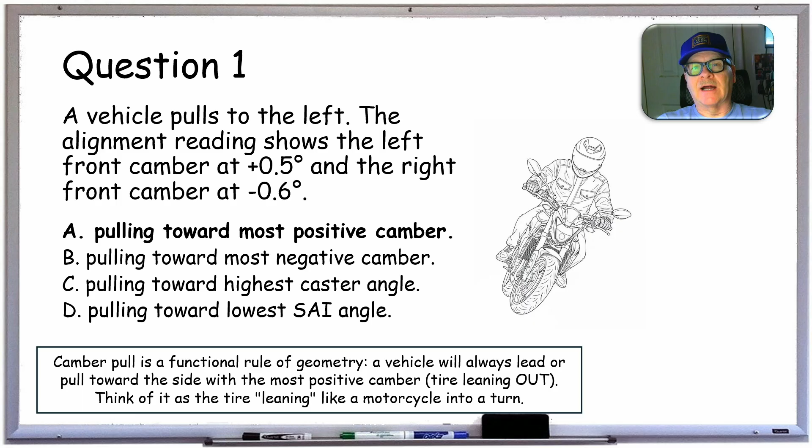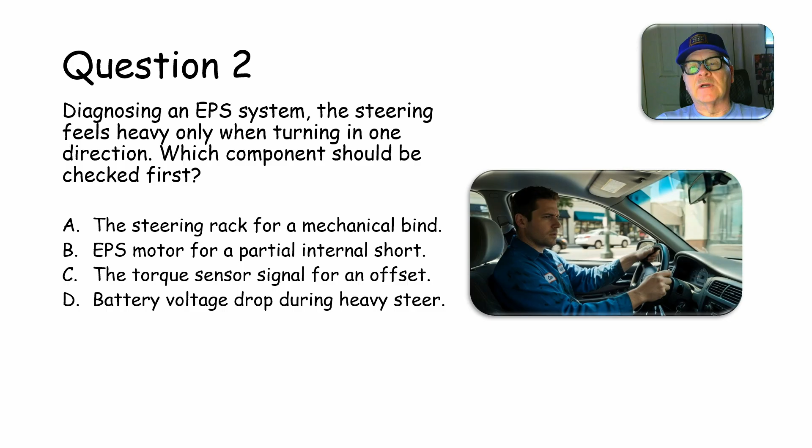What do you think about that? You need a lifeline? Tink, tink, tink, tink. All right, whenever you do that, you're supposed to check the torque sensor signal for an offset. If one signal is skewed or imbalanced, the ECU won't command the motor to provide equal assist in both directions. That's something really important there.

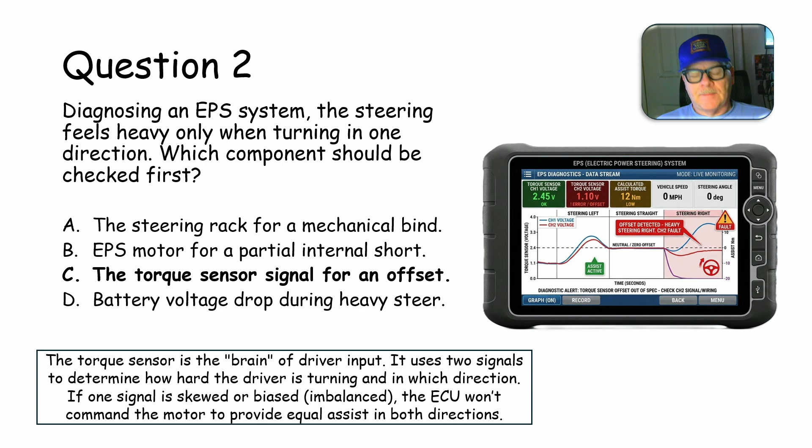All right, let me see here now. You can read those little explanations in the boxes down there. I don't need to read those to you necessarily.

Question 3. Which angle is typically adjusted first to establish the vehicle center line? Front caster, rear toe, rear camber, front toe.

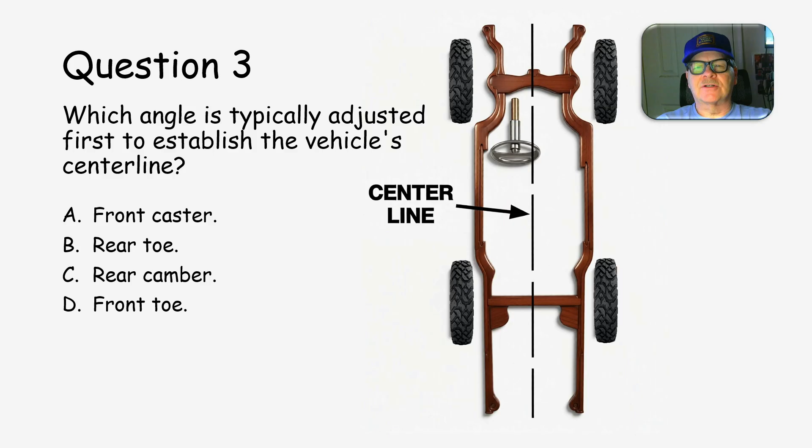All right, that one is going to be rear toe because you're always supposed to start at the back if there's alignment available back there. Of course, on your vehicles with a solid rear axle, if the rear axle is crooked under there, the thrust line is going to be wrong. But if you start from the rear, if you don't line those rear wheels up first, get particularly the toe, but the camber and the toe.

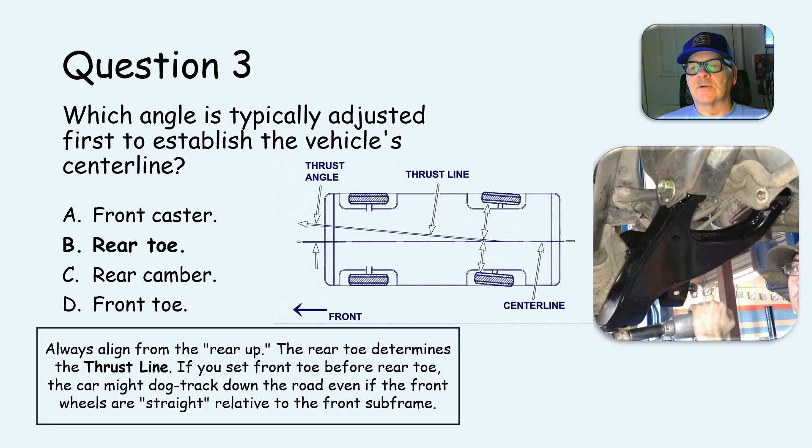Question 4. A technician replaces an EPS steering rack and the steering wheel is now off center. What's the required next step? Do you remove the battery to reset EPS memory, index the steering wheel on the splined shaft, adjust the tie rods to center the wheels, or perform steering angle sensor calibration using a scan tool?

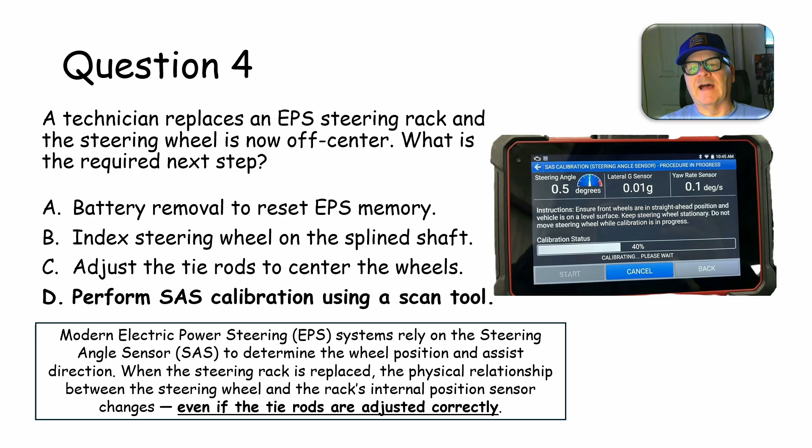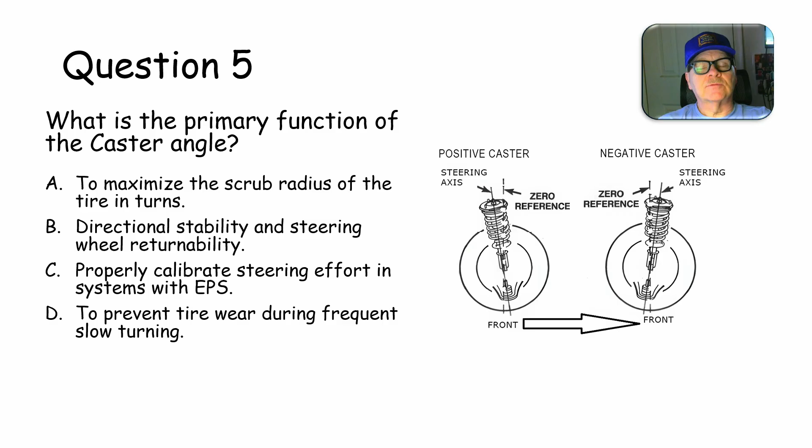Question 5. What's the primary function of the caster angle? Does it maximize the scrub radius of the tire in turns, directional stability and steering wheel returnability, properly calibrate steering effort in systems with electronic power steering, or to prevent tire wear during frequent slow turning?

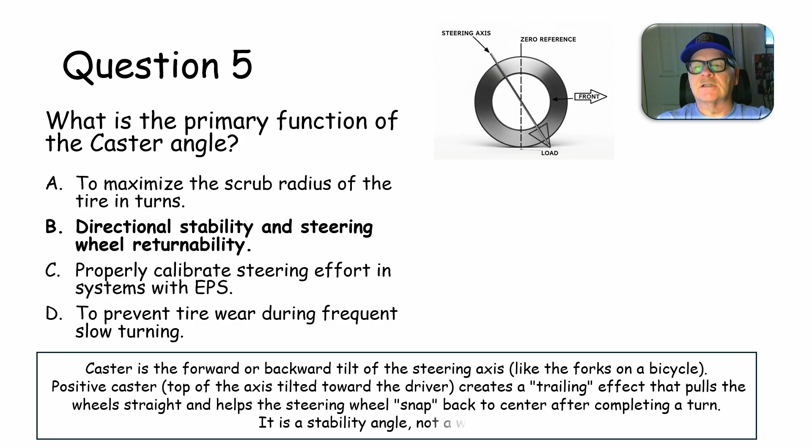All right, directional stability and steering wheel returnability. Now this is a diagram I worked on for a pretty good little while. I drew this from scratch, so I hope you appreciate it. This is obviously your caster angle. As you bring this farther forward, the caster's going to be more negative. The farther back this angle is, that's your steering axis running through your ball joints, through the bottom ball joint and the strut and all that.

But you notice right here, whenever you turn the wheels, it raises the vehicle up a little bit. And you go back to the center, it goes through the low area, and then you turn the other way, it raises up a little bit. It always wants to go back to the center, and that's going to help you with that. Now, caster can cause a shimmy, but it won't typically cause tire wear, so remember that.

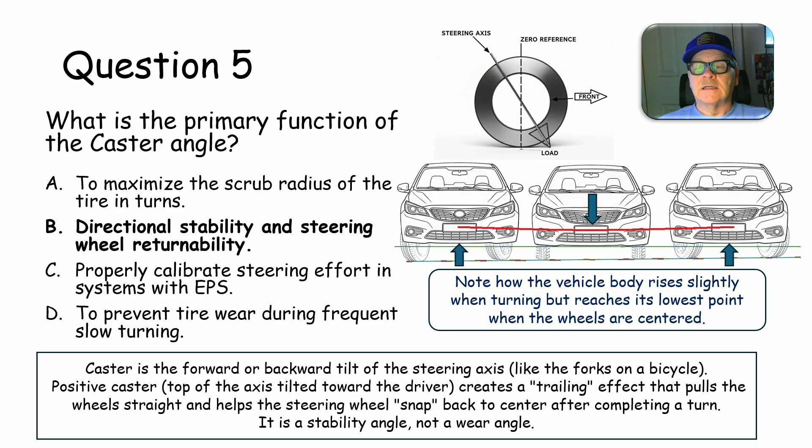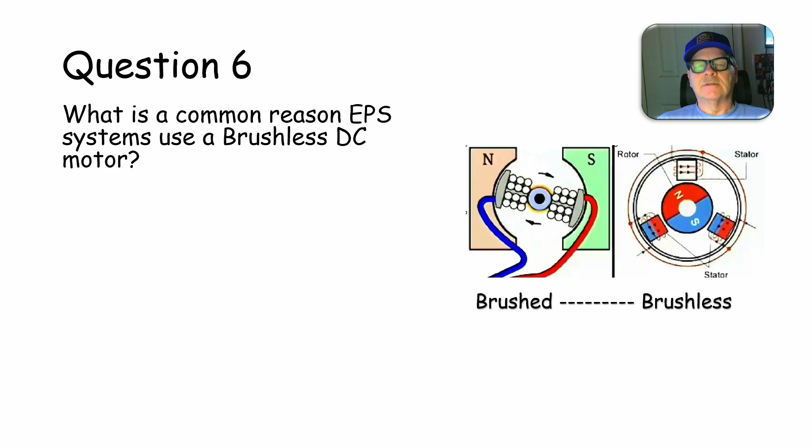Question 6. What is a common reason electronic power steering systems use a brushless DC motor? It allows the system to operate without an ECU and requires only a 2-wire motor connection, higher efficiency and better heat dissipation, and prevents all magnetic interference with gasoline direct injection.

All right, this one right here, this is the ones that have the motor up in there under the dash, instead of out here on the rack. This is the one, that's how they're fixed up. They got this worm gear, and it operates that, and this spins back and forth real fast.

The thing about brushless motors is you can have instant power as soon as you want to take off. So that's why your Teslas and your hybrid vehicles have got the 3-phase motors. Of course they're AC. These are DC.

But the long and the short of it is, whenever you throw the juice to that thing, you instantly got full power. On a motor with brushes, there's issues with the brushes. You don't have full power instantly or as instantly as you do with a brushless motor. A brushless motor is more efficient.

It's less wear prone. Now, it does require electronic circuits to work, like I was talking about the other day. If you take a computer fan, a 12-volt computer fan, like you're going to take out of an old computer or a new one that you may have on hand if you build computers like I do sometimes, and you got a 12-volt motor, and it's only got 2 wires going to it from the computer board, and you can clip those wires if you want to play around, and you can connect them with the red to the positive and the black to the negative, and the motor will spin.

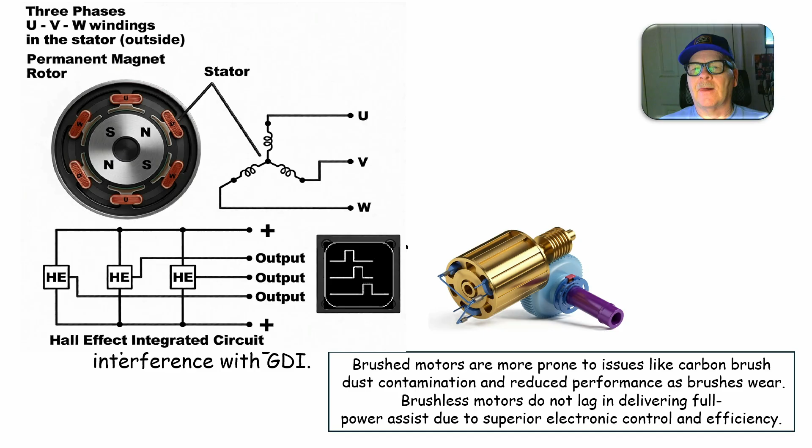And the point is, it's kind of like a stepper motor. The stepper motors on your idle air control and other stuff like that, it can move it a certain amount of distance, and then it can back up a certain amount of distance without just spinning up really fast and overshooting or something like that. But you got a lot more power and a lot more efficiency with the brushless motor.

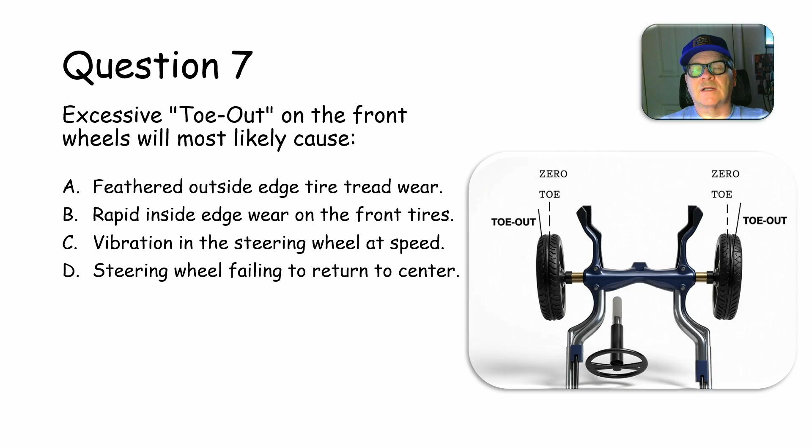Question 7 is, excessive toe out on the front wheels will most likely cause A, feathered outside edge tire wear, B, rapid inside edge wear on the front tires, C, vibration in the steering wheel at speed, or D, steering wheel failing to return to center.

You got a rapid inside edge wear on the front tires. Vibration in the steering wheel at speed is not going to be there. Steering wheel is not going to fail return to center because of this. That's a caster thing. That means they're scrubbing down the road sideways.

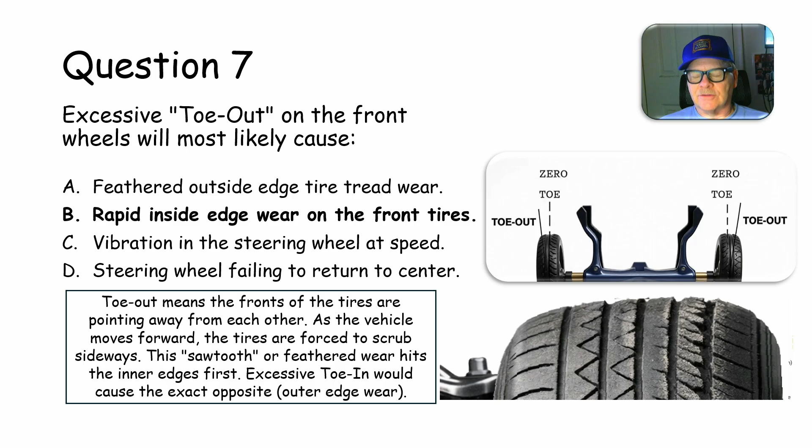We talked about that the other day. And whenever you're scrubbing down the road, this inner side is going to wear out, and it's going to feather this outside edge. So kind of watch for that. Now you drag your finger across, you can feel those little sawtooth edges. That's fairly straightforward there.

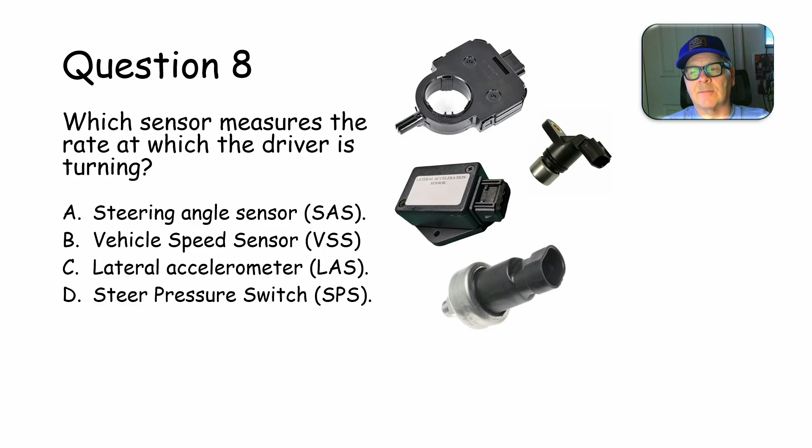Question 8. Which sensor measures the rate at which the driver is turning? Steering angle sensor, vehicle speed sensor, lateral accelerometer, or steering pressure switch?

This is illustration, the steering angle sensor. A steering angle sensor on some vehicles is built into the airbag clock spring, which is not really a bad idea. But if you have to replace the airbag clock spring, obviously you got to have the steering wheel dead center. You may have to go in there and calibrate that thing after you get the clock spring replaced, if the sensor is built in.

So anyway, it doesn't need to just know the position of the wheel, though. It needs to know how fast you're turning it.

Whenever they put active suspension on the Thunderbirds and stuff, they had a steering angle sensor on there, and they would measure if you had more than 400 psi of brake pressure in the lines, or if you turned the steering wheel past a certain rate, it would firm the suspension up. That was part of what the controller was looking at to do that.

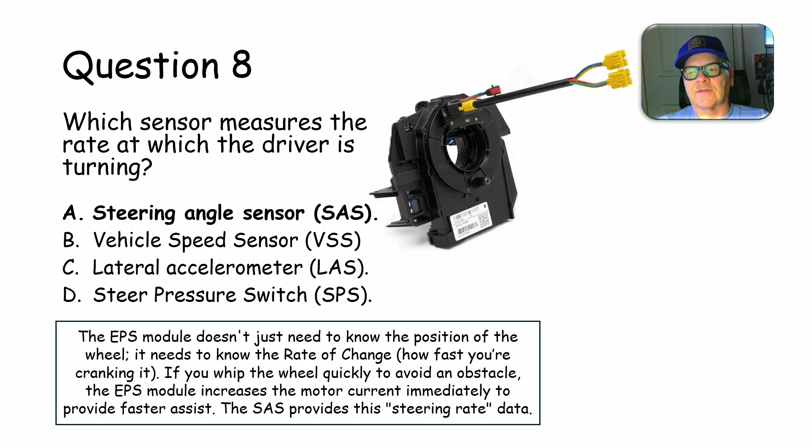But if you whip the wheel quickly to avoid an obstacle, the EPS module increases motor current to provide faster assist. It's going to follow what you want it to do. Of course it's got a sensor in there that's also telling it how hard you're turning it, and that steering angle sensor provides steering rate data.

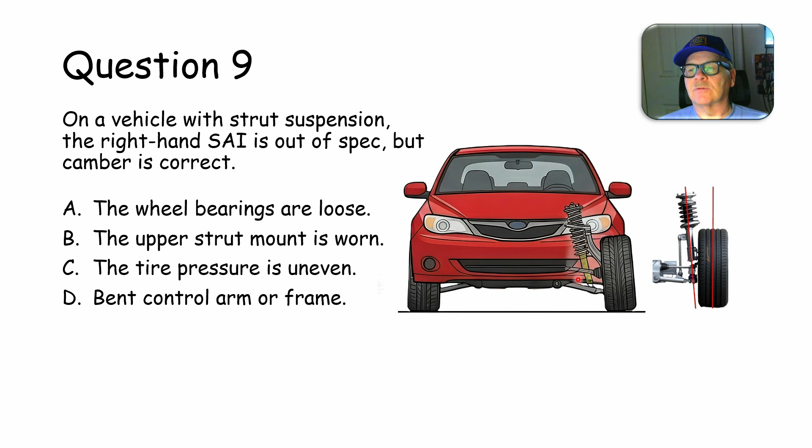All right, it's going to have a bent control arm or frame.

The people at the body shop used to send Eddie, the front end mechanic, cars to line up because they'd done a bunch of body work on them. They had a really nice, expensive Continental frame straightener back there too. They'd bring the car over, and he'd say this thing won't line up, he couldn't get the camber set, because it was bent somewhere.

The steering axis inclination was off, and it would annoy him because he'd go back and say this won't line up, there's something bent. They'd ask, well why won't it line up, what's bent? But they had the frame straightener and the means to measure all that themselves, they wanted the front end guy to give them all that information, when they should have been able to figure it out with their own equipment.

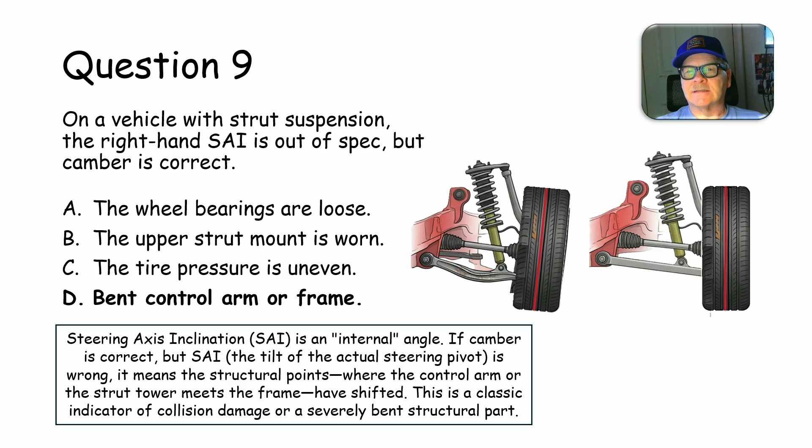But if camber is correct while steering axis inclination is wrong, you cannot adjust steering axis inclination because it's a non-adjustable angle. That means there's some damage somewhere that needs to be taken care of.

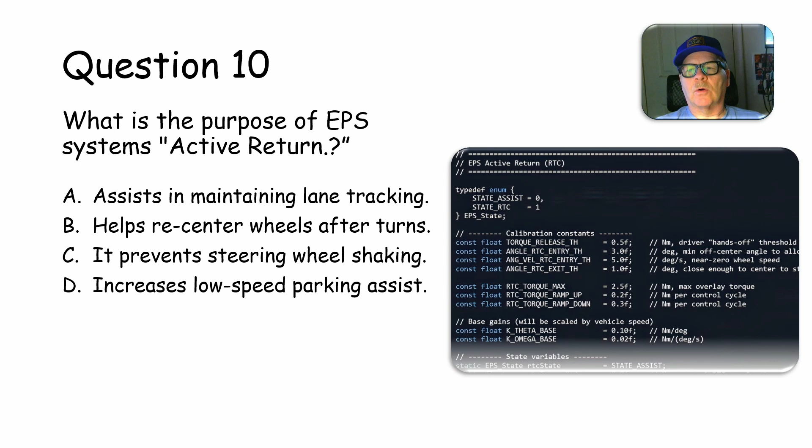Question 10: What is the purpose of the electronic power steering system's active return? It assists in maintaining lane tracking, helps recenter the wheels after turns, prevents steering wheel shaking, or increases low speed parking assist. See them algorithms over there.

It helps recenter the wheels after turns, believe it or not. It assists the caster part of it, and if it sees the driver has let go or reduced torque, it knows where zero is, so it helps pull it back to zero. In other words, it aids the natural caster effect in doing that.

So that's going to be the end of that particular presentation there. I had a video I could have played of all my students, but I don't really want you to see their faces and everything. There was a 2008 Chevy SUV.

One of them came in, and it had electronic power steering on it, electric power steering. I knew it had electric power steering, and we were doing steering and suspension that day at the college. So I had the girl that owned the vehicle pull it into the shop, and I said I'm going to open the hood and just sit in the car. I'm going to have these guys check your power steering fluid. I opened the hood, and all the students came out of the classroom.

This was years ago. I told them I needed them to check the power steering fluid on this. They looked under that hood for 10 minutes trying to find it. If I were doing that for the first time, I'd go over to where the pulleys are and look to find the power steering pump pulley, that's how I'd find the pump. Then I'd look for the remotely mounted reservoir that's usually up there in your face, but this one didn't have one. They were pointing at the oil filler cap and all kinds of stuff trying to find it, and they were sort of punked when I told them what to do.